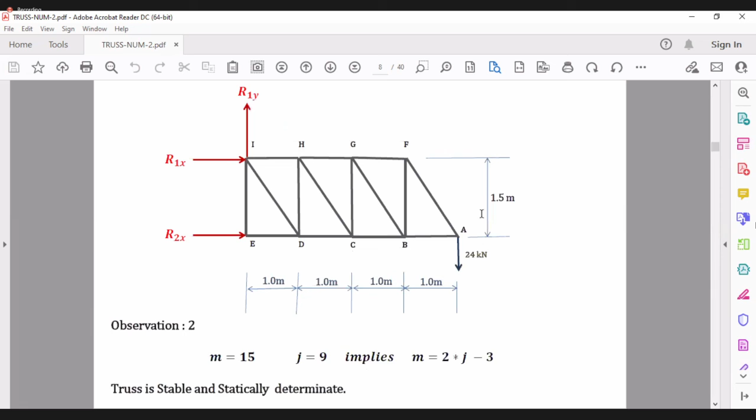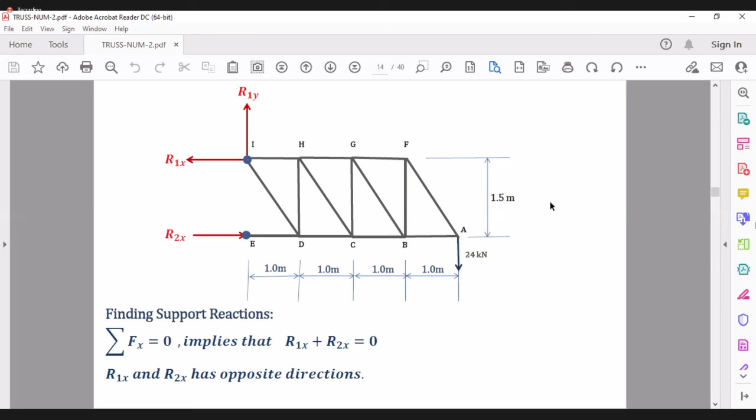This is a problem we started solving. We found out the reactions. This is joint A. What we did was observe equilibrium of forces at point A.

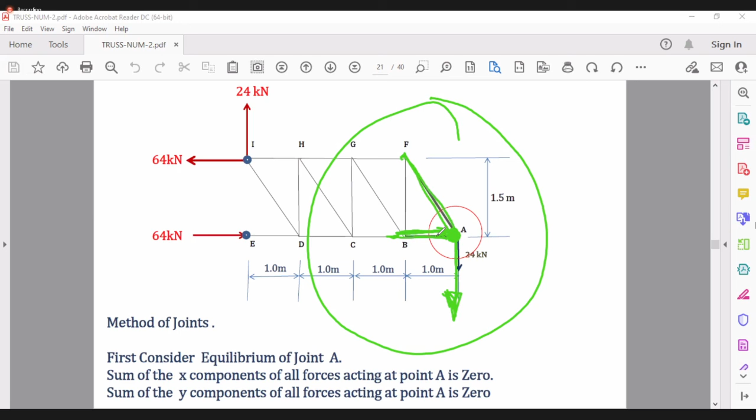Then there are two forces here, and all these three forces together, their sum is 0. Here direction and magnitude both are known. Here only direction is known, and here also only direction is known. So that way we can say this element should pull point A upward, because then it can have a y component upward, and that upward y component will balance 24 kilonewton, and the sum of forces in the y direction will become 0.

Now this has got to be 24, and we calculated that for that this becomes 28.8461 or something. If that is it, then there is a component over here also. This particular force has a component here also, and that must be balanced by B pushing it backward.

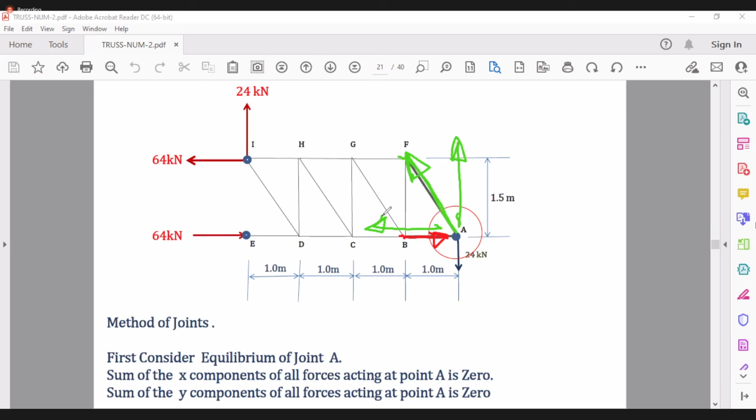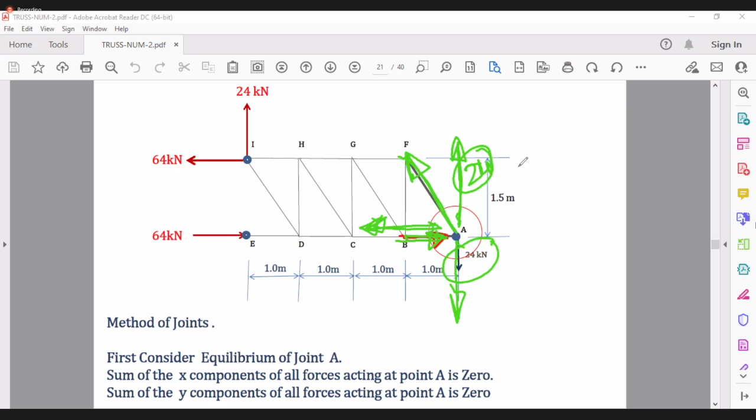In short, this force in an inclined direction has two components, one in a positive y direction, other in a negative x direction. Force in a positive y direction is balanced by another force in a negative y direction, which is 24, and this also should be 24. Then this particular component is balanced by a compression in element BA. As a result, we are working on this, and we now know that element AF is in tension with a force of 28.8461, and this is in compression with a force of 16 kilonewton.

So we have solved joint A. We know all the forces at joint A. Then now is the time to go to joint F.

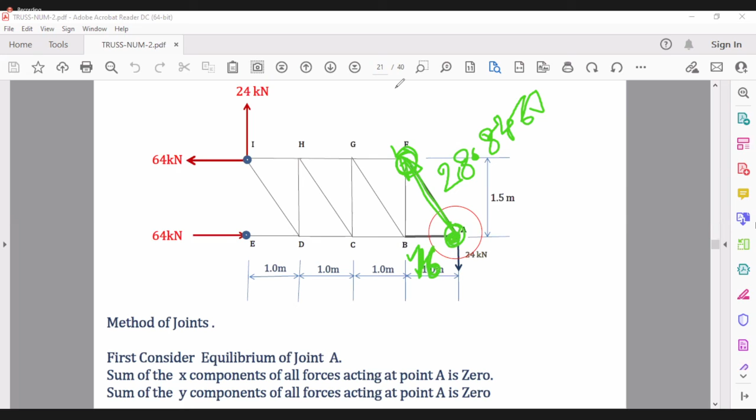Which is very easy to do. Now we are at a joint F.

Excuse me, sir. Yes, tell me. Sir, I am getting confused in arrow direction, like sometimes you have taken the arrow direction inwards and sometimes outwards. So what is the criteria? Let's go back just a moment. Okay, sir.

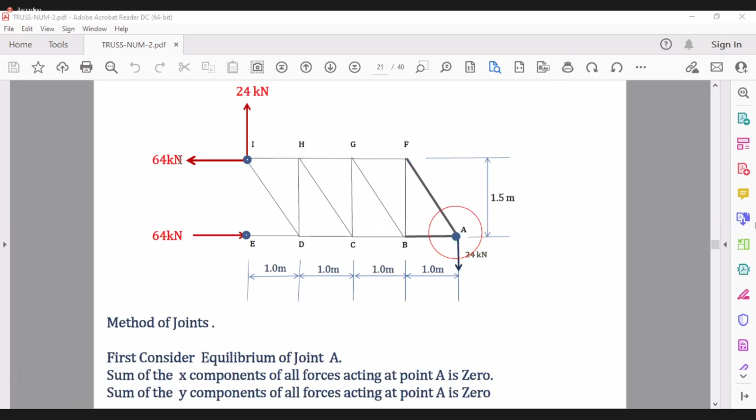In this last diagram, you have taken the arrow inwards. Okay, just a minute, now you can unmute yourself and listen to me. Thanks for this question anyway.

Here at a point A, there is a 24 kilonewton force downward. Agreed? Yes sir. Now there is an element here and an element here. The force in this element and this element should be such that the net sum is 0. That means the y component of all three forces, this one and this one, should be 0. And the x component of this one plus this one plus this one also should be 0.

Let us first consider the y component. This 24 is a y itself, isn't it? Yes sir, it is a downward 24. This one does not have any y component, so while we sum the y component, this is useless, we forget about it.

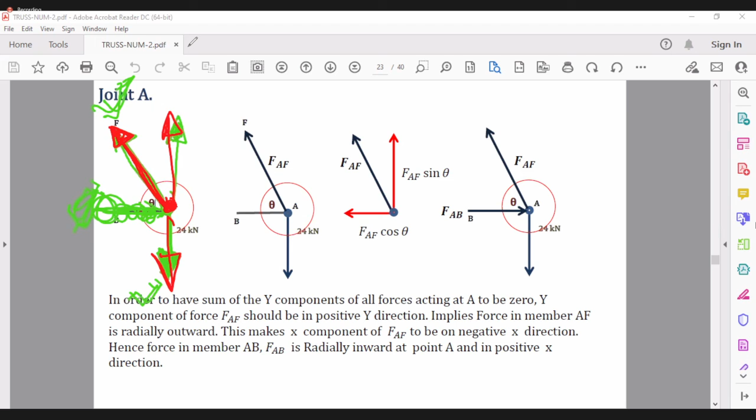Now this one is inclined in this direction. Its y component is cancelling this 24, so at this point there is no force in the y direction. Same way, we do not want a single force in the x direction. This has a y component of 24 and an x component of 16.

Now, to balance this 16, this particular BA must be pressing in this direction. Correct? Yes sir. So now you can see AF, I am drawing an arrow this side. It has one component upward which is balancing this 24, and another component leftward which is taken care of by force FAB, which is rightward. Am I right? Okay sir, it demands a thinking, no doubt.

And that particular thinking, though very simple, will not come offhand. You should make some mistakes yourself. Try to solve some problems yourself also, which I have already sent you on Moodle. In the Moodle I have sent you a few problems, there are some solved problems also and some unsolved problems also. Make a mistake, and you will be feeling great. Nevertheless, thanks a lot for raising this issue. Don't hesitate to ask me a few more questions.

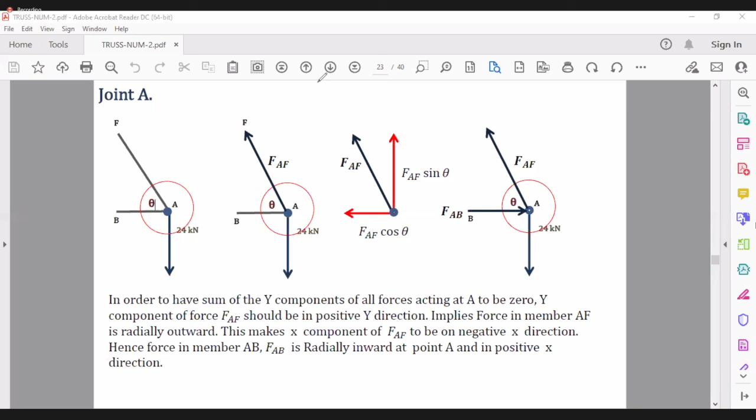Now, once this is over, we come to the joint F over here at this place. At this point, this element is pulling the joint A, so the same element is pulling the joint F also. This is very important to understand. Are we clear about this?

Because this element AF is in tension. If you take a rubber band and pull it, then both ends of the rubber band are pulled outward, and at both ends, the rubber band is pulling our fingers inward if we are pulling it with our fingers. So this AF is in tension, right? And it is pulling A and pulling F also with the same force.

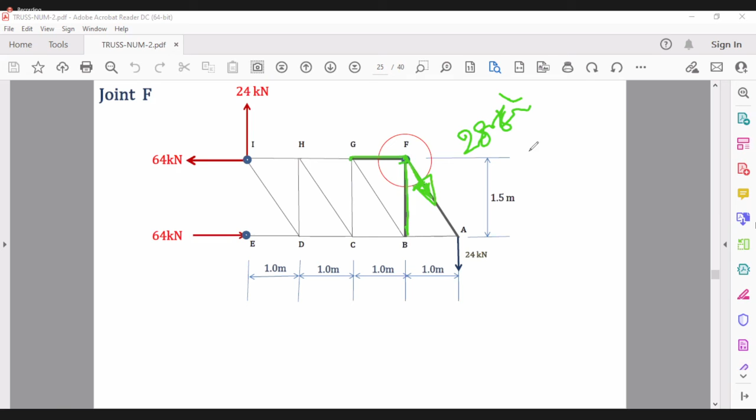So here at this point, this force is 28 point whatever, and these two forces are not known. Now we will analyze it further. We have come...

...to a joint F. Cadets, please pay attention here, this is so simple that we might miss it. This is joint F. Element AF is pulling it outside. This pull has two components, one FA cos theta and another FA sin theta. So this FG should cancel this, and FB should cancel this component. Am I right? Is it very clear to you?

Yes sir. FA is giving two kinds of pull, it is 16 in this direction and it is giving 24 in this direction. So this guy is cancelling 24, this is cancelling 16. Correct? So now we can say that member FG is 16 kilonewton in tension, and member FB is 24 kilonewton in compression.

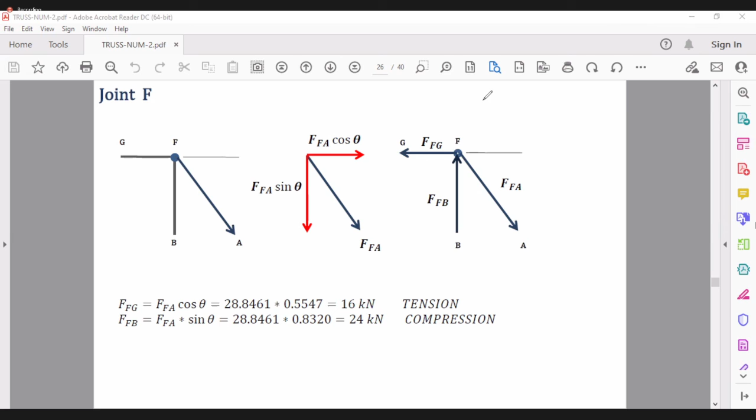There is nothing else other than this. So now we know the force in two more elements. We found it out earlier in AF and AB. Now we know it in FB and FG also. Correct? We can now go further.

Now look, we know the force in this, force in this, force over here also, and a force over here also. So now we come to point B, so that we can find a force in these two things. At point B, what we got to do? There are four forces. Two are known and two to be found out.

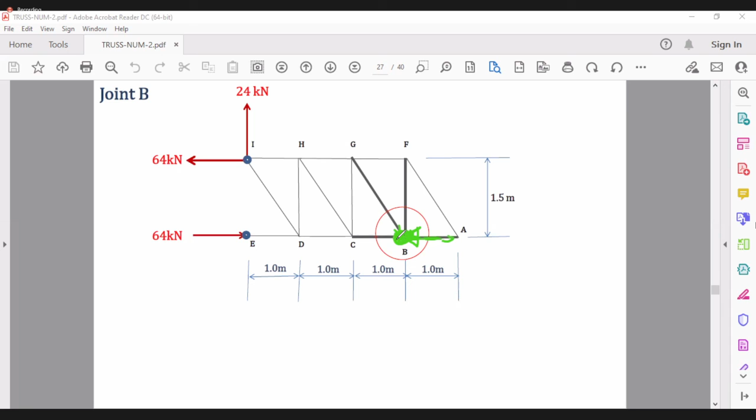AB is a compressive force of 16. So AB is giving a force like this. FB is a compressive force of 24. So it is acting like this. Now forces in this element and this element should be such that net force is zero.

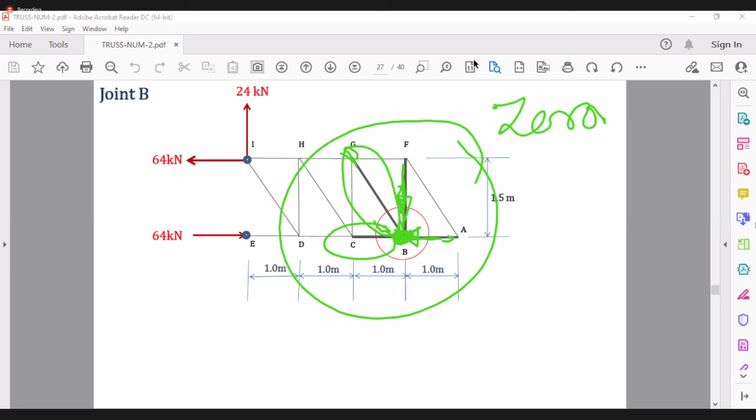For that, we just go ahead and play our game at a particular joint like this. Look, dear friends. Now this is our joint B. Joint B is pushed by BF and that is 24. And this is 16.

Now, how should be the forces so that this gets nullified? This force is fixed. This force also is known. Now, force in GB should be like this. Then it can have a vertical component which will cancel the downward component.

Is every cadet understanding? Does anyone have a curiosity or a doubt? Please ask me. I repeat here that this particular force's vertical component is cancelling this downward 24 kilonewton.

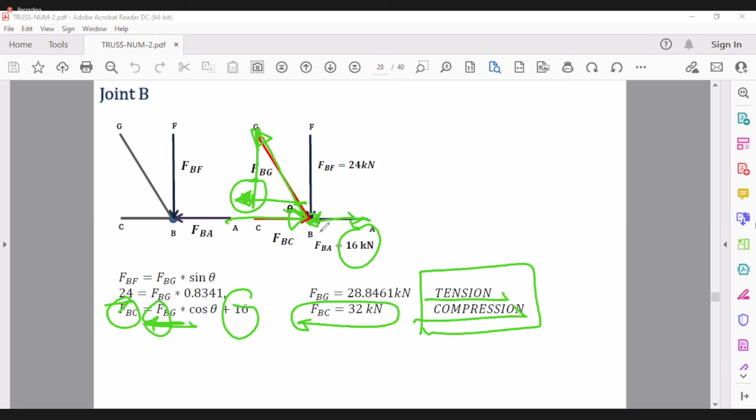Is it understandable, dear friends? Will someone say yes or no? Yes sir, understood sir, understood. Yes sir. Okay, that is very nice. Little slow in the beginning will ultimately help us a lot.

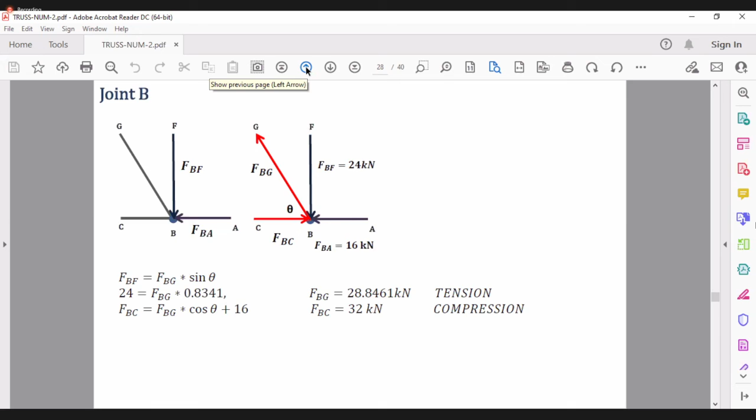Now I will show you something. This is our frame. This is the external load. When we worked on A, we found out that this is tension T, this is 24 compression, 16 compression. We solved this joint also. We found out this is 16, this is 28, and today we found out this 32 also. We have finished joint A, F, and B.

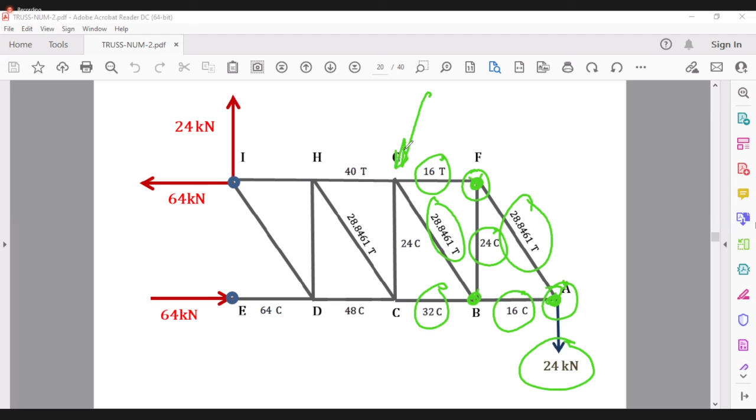Now it is time to go to joint G. We cannot come to point C because so far we know only one force coming to C. These three forces are not known. So first we will find out there are four forces here also, but out of those four, this 16 and this are known to us.

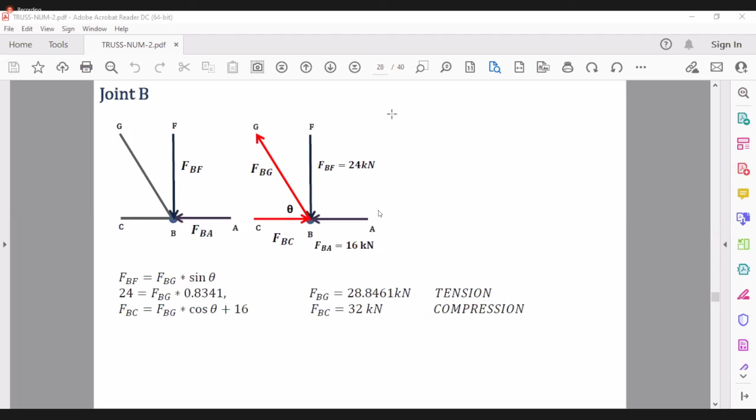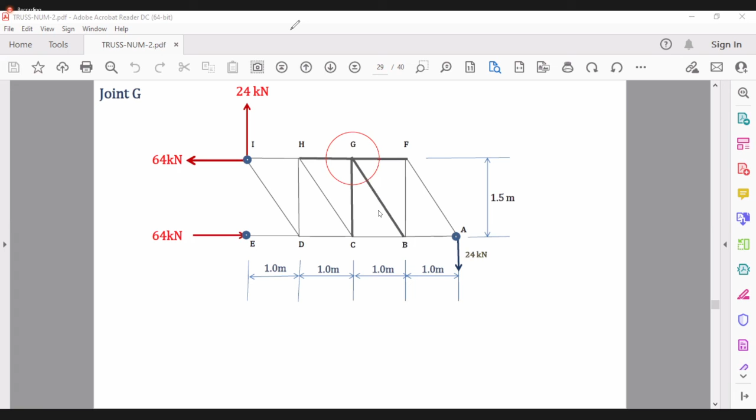Now we want to go to point G. Yes, here we are. This is point G. And at point G, we know this force and we know this force also. This is something. Let us work here.

Here I have made one error which I will show you. It happens when you are as absent-minded as I am. But I have realized it because I was trying to teach you. This 24 is not 24, it is 16. Now there is a 16 here and there is a 28.8461 here.

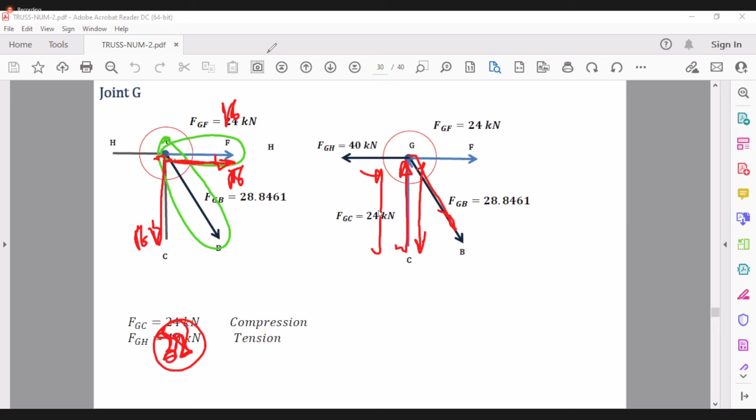So if we take all x component, y component, this is an x component itself. This is having x and y both. It has an x of 16 and it has a y also of 24. Now to balance, the y component of this element should be equal and opposite to the y component of this. So this was 24 like this, so this has gone 24 over here. And this is 16, this also is 16. So this should actually be 32, bachcho. It is my blunder, nobody else's. What we can do is we can correct it right away.

Now let us study here only in a PPT. So after finishing this point G, we can come to the point C. Agreed? At point C we are now.

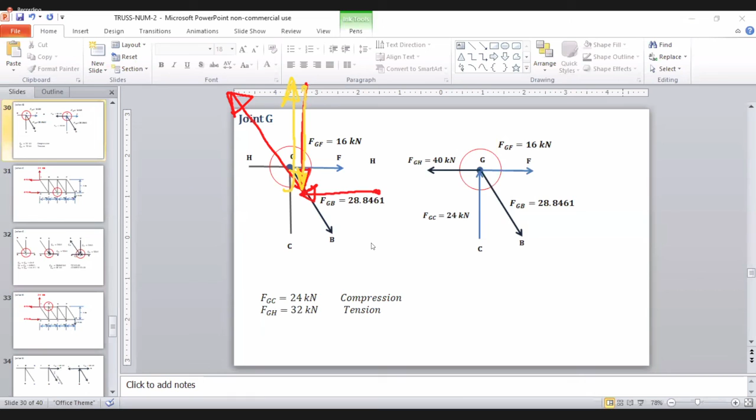Downward 24 kilonewton. Excuse me sir, what do we have to take for FGH, 40 or 32? In the diagram it is 40 kilonewton and below it is 32. Right now there is no GH in this - maybe you are seeing some other slide. No sir, here only, the arrow shows 40 kilonewton and inward it is written 32 kilonewton tension, force GH. One minute.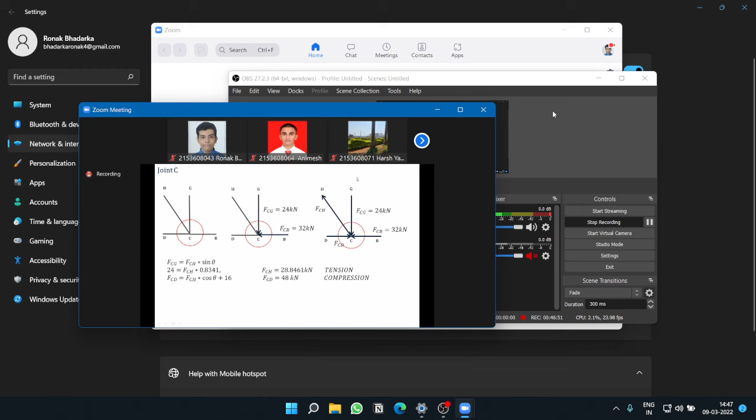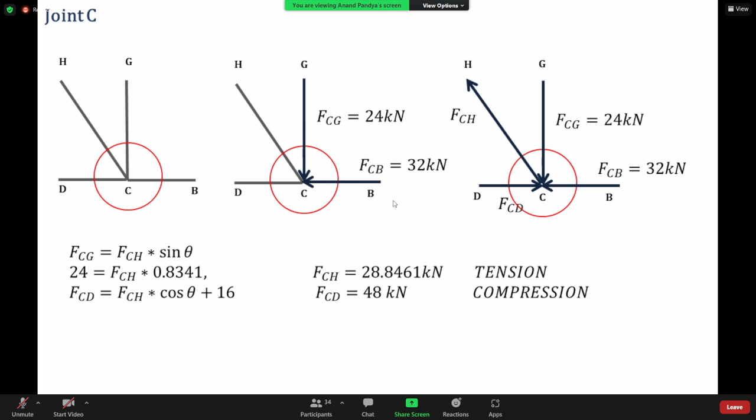Now do you see this slide? Yes sir, but in that joint G, sir, what do we have to take, 32? Earlier slide you mean to say? Yes sir, joint G. Yes sir, in this, joint G. Yes sir, the force FGH below is 32 kilonewton and in the diagram it is 40 kilonewton. So what do we have to take? Just a minute.

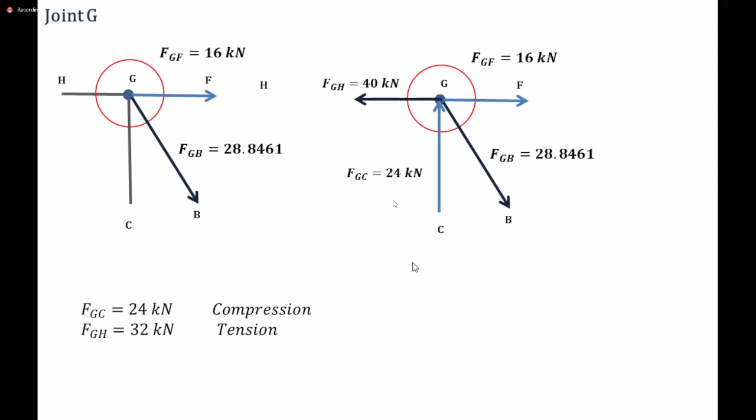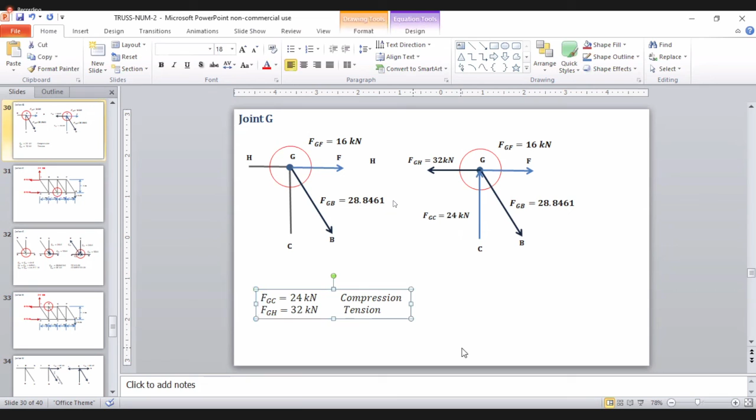This is joint G. Here this is 16, and this force also has a 16 component here, so this is 32 only, that's why 32 is written over here. Earlier I had mistakenly written 40. I am correcting it. This is what happens when people like me also don't practice - we get carried away. I have full knowledge of how to solve this problem, but my execution became lousy because of this.

So now we were at joint H, or joint C. At joint C, as I told you, this is 32, this is 24. So this has to be radially outward such that its y component is 24. If that is the case, this has got to be 28.8461. Then, if this is 28.8461, over here it will have a component of 16. There is already 32 present, and another 16 came, so it has become now 48. Joint C is now over successfully, and we can go to joint H.

At joint H, this 40 was an error, as you know. This was 32 only. It has a component of 16 over here and 24 over here. As a result, this should be 24, this is 16, and this is 32, so this should be 48. This 56 is wrong because earlier I had taken that 40 - that is not 40, that is 32, so this is 48. So HI also is now 48.

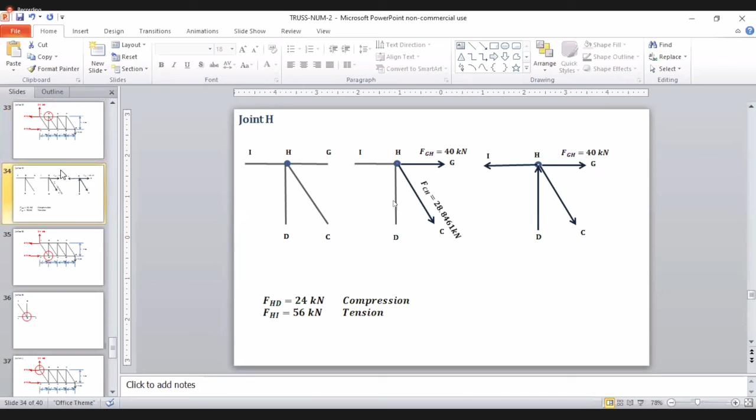Can you please tell it again, sir? Sir, how is FCH outwards? Okay, good. Can you see anything? In joint C, sir. In joint C, okay. Is this what you are talking about? Yes, sir. Okay, at joint C...

There are 1, 2, 3, and 4 elements meeting. Some person should mute his mic.

We don't know which is pulling the joint or pushing the joint, but this one we are aware is 32 kilonewton, and this one is 24. Now forces in this and this should be such that these two forces are nullified. First let us nullify this 24 kilonewton. That 24 kilonewton cannot be nullified by this because both of them are perpendicular to it. It can be nullified by the y component of this only. This 24 is downward, so the y component of this has to be upward, then it can be zero. If this is upward and this is the y component of this, then this should be like this.

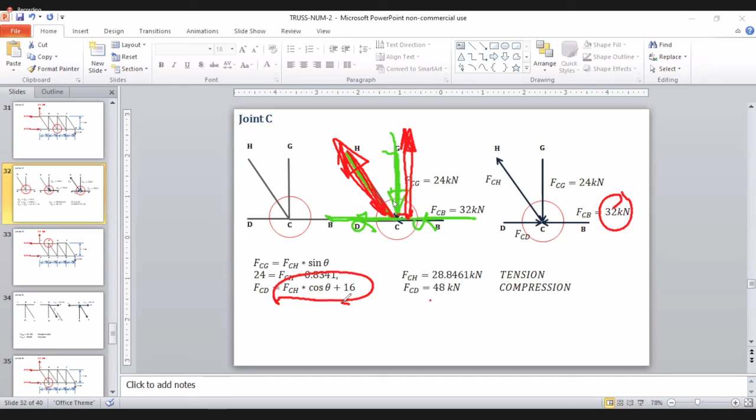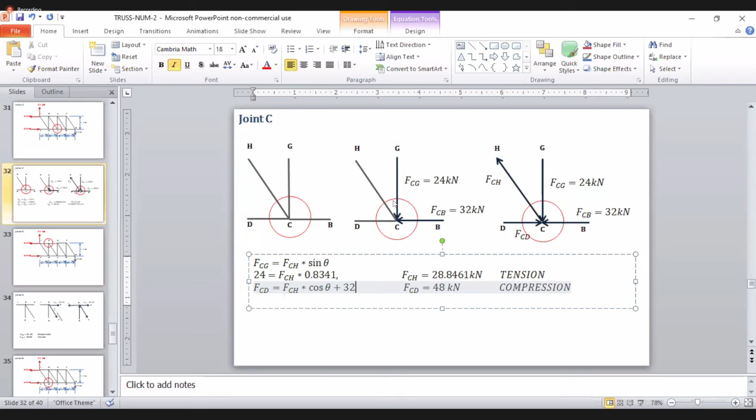Understood? Now in FCD there will be FCH cos theta plus 32, no? Very good. FCH cos theta plus... because sir, FCB yeah, 16 plus 32, so it becomes 48. True. That also is... that's why it is 48. That is just perfect.

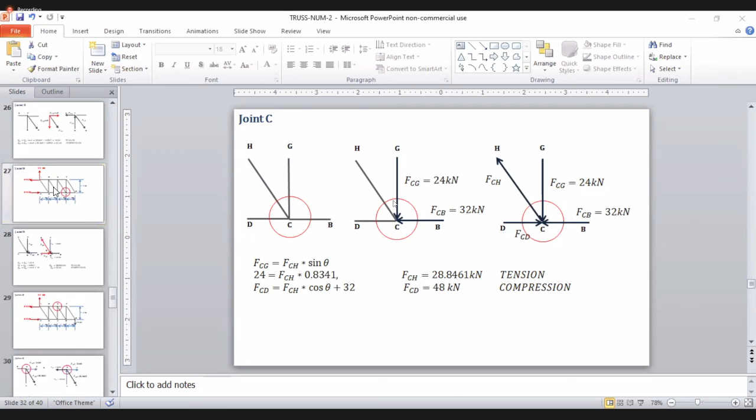Okay, now I encourage all of you. I'll put this into a document and send it to our CR soon. Maybe you'll find some error, but I am not scared. You can correct my errors and just send me this, then practice about the remaining joints. There are a lot of joints which we have not solved so far. Maybe you can solve them. We have solved A, F, B, C, and G. Remaining HD, IE, you can solve tonight and see your feelings.